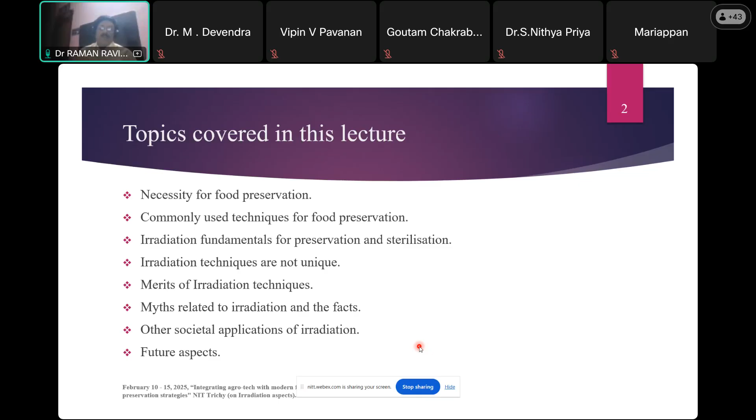So these few slides I will go a little faster. The necessity of food preservation is prevention of spoilage and decomposition, extension of shelf life. These have been very well dealt with by the earlier speakers in detail. Ensuring food value, health, prevention of wastage, and obviously economic benefits.

In this, prevention of spoilage is microbial growth because that rots and ferments, dormant enzymic activity that makes changes in color, texture, etc. Chemical reactions, oxidation, causing rancidity, browning, and all that.

Ensuring food value is important because everybody is now aware of food values and all that. Even the youngsters are aware. Enormous awareness has been created in the society also. So availability should be there.

Actually, this availability comes under food security, not safety. Then transportation over long distances without spoiling, because transportation is very essential. Even Swiggy, Zomato, and others, they are available over long distances also without spoilage, and accordingly the trade benefits.

Convenience, I think Professor Anand was telling about this convenience. Now husband and wife both are working, they cannot go for frequent shopping, they have to save time and other things. Prevention of food poisoning, so at the same time maintaining nutritional values.

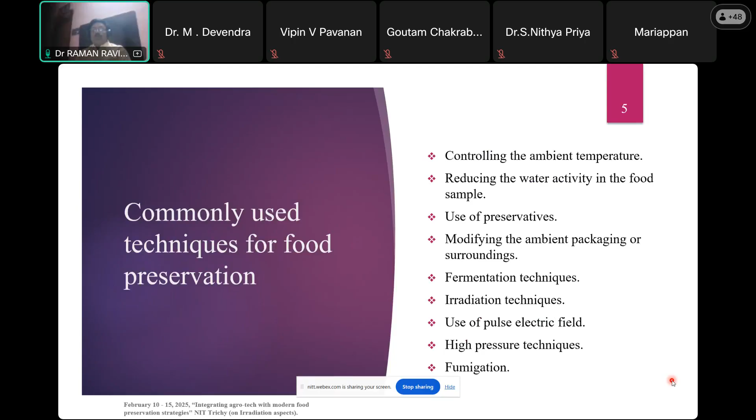Commonly used techniques, which you have seen also: controlling the ambient temperature, reducing the water activity in the food sample, use of preservatives, modifying the ambient packaging or surroundings, fermentation techniques, irradiation technique that we are going to deal with, use of pulse electric field, high pressure techniques, and fumigation. General techniques, temperature control, refrigeration, what we do in our homes.

This also dealt with, I will go fast. 0 to 8 degrees, freezing is below minus 18 degrees if you want to preserve for long term, and blanching before freezing if you do heat treatment—before freezing or before drying, that's called blanching, to inactivate the enzymes. Water reduction, humidity plays a very important role in spoiling.

So drying: sun drying, air drying, freeze drying, spray drying, drum drying, and all that inhibit spoiling. Salting and sugaring, yesterday the lecturer explained in detail, adding salt and adding sugar.

Since I am sharing my things, everything is there in simplified form, people can use it. Chemical preservatives: acids, lower pH, vinegar, citric acid, lactic acid, and others. Benzoates, sorbates, sulfites, nitrates, antioxidants, prevent oxidation.

As I already mentioned, oxidation gives rancidity and discoloration, so preserving means preventing oxidation. Then modified atmospheric packaging and other. Yesterday also the speaker nicely explained about this packaging with nitrogenous packing, CO2 packing, vacuum packing, and others.

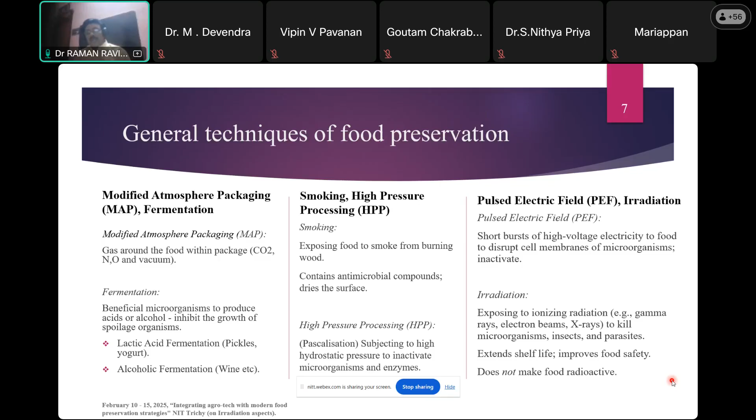Gamma rays, electron beams, X-rays are used for irradiating to kill microorganisms, insects, parasites, and it extends shelf life, improves food safety. The main thing is this—I will be repeating many times—this irradiation does not make food radioactive. Irradiation fundamentals.

Irradiation is a food preservation technique, similar to other techniques. It uses ionizing radiation to kill insects, molds, bacteria, and other microorganisms in food. It also inhibits sprouting and delays ripening. Similar to pasteurization of milk, it's called cold pasteurization, but used for a wider range of foods. Gamma rays, electron beams, and X-rays are used.

The process and mechanism will just see in brief, then we'll go detail. Actually, I told you 3 methods: gamma ray irradiation, electron beam irradiation, and X-ray radiation. X-rays and gamma rays belong to electromagnetic radiation. Electron beams are particle radiation, meaning particles. Gamma rays are from standard sources, very active high sources, kilocuries and megacuries.

This is basically an irradiator facility. The source is housed in a shielded container, with a shield opening and all that.

Basically, 2 types of sources are used according to the need: cobalt-60 or cesium-137. If somebody wants higher energy, then cobalt-60. Or lower energy but longer half-life, meaning you have to anyhow change it after 2 or 3 years, because the source activity gets decayed. Because all these radioactive sources have a half-life. They are getting decayed, disintegrated. Cobalt-60 is for high energy applications, and cesium for low energy, but if they want a longer duration of operation.

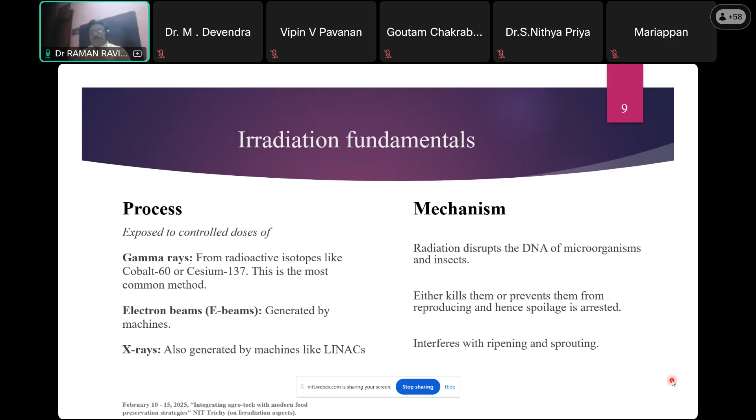The purpose of irradiation: disinfestation, shelf-life extension, stops germination, stops sprouting, improves technical properties like flavor and texture, delays ripening, and decontamination, especially for cereals and pulses, where you remove unwanted microorganisms, insects, and flies.

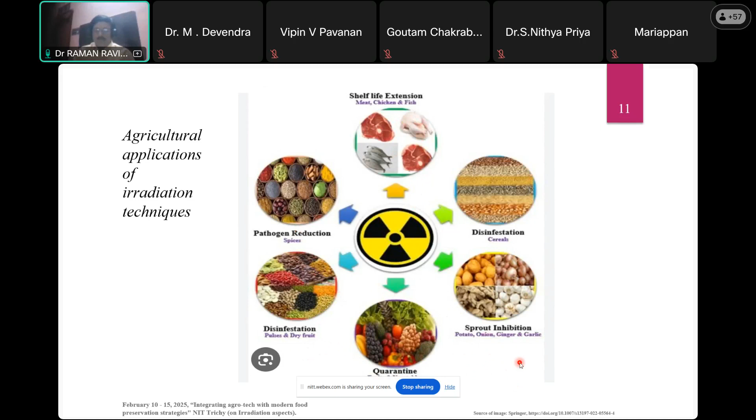Now we'll go to the food irradiation history. It's a long history, starting from the discovery of X-rays in 1895. The first patent for ionizing radiation for preserving food was in 1933, the first commercial application for food irradiation was in 1953, and FDA approval for using irradiation to sterilize food products was in 1958.

FDA approval for irradiation to control insects in wheat and wheat flour was in 1963, and product standardization, that is UN standard guidelines, was done in 1980. FDA approval for control of microorganisms in pork products was in 1986. European Union approved all these things in 1990, irradiation approved for pathogen control in meat and poultry, and in 2000 also approved for shell eggs.

And 2003, the great thing happened: WHO and IAEA endorsed the safety and efficacy of food irradiation. Our Atomic Energy Regulatory Board and FSSAI and others have also consequently approved it.

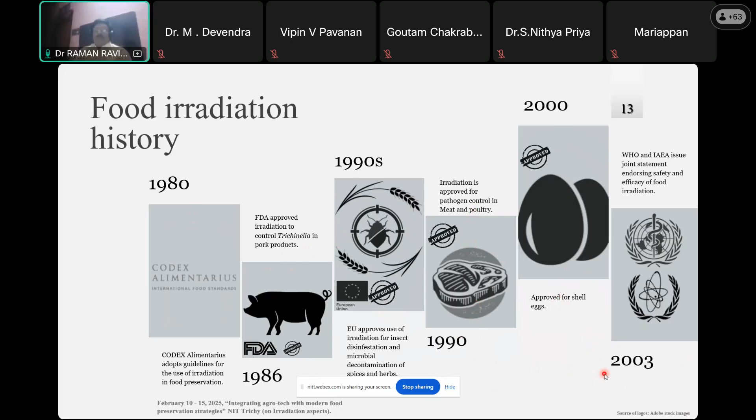Irradiation techniques are not unique, meaning they are multiple. Again we have seen the same thing: gamma radiation, electron beam radiation, and X-ray radiation. We'll see these in detail.

Gamma radiation, as I told you, uses two sources: cobalt-60 and cesium. Somewhere, very rarely, iridium-192 is also used, but generally cobalt-60. They have a wider beam - you get a wider beam in cobalt-60 as well as cesium-137. Cobalt-60 is a gamma emitter; first it's a beta emitter, and it emits two gammas.

The energies are expressed in million electron volts, which I will explain later. Just remember, MeV is the energy unit for these gamma rays and other subatomic particles. Cobalt-60 emits two energies: one is 1.17 MeV and 1.33 MeV, in addition to a beta. In fact, two betas are possible, either one can happen.

The other source is cesium-137. Cobalt-60 has a half-life of 5.3 years, and cesium-137 has a lower energy, 662 keV, but a half-life of 30.5 years. But 662 keV is also a powerful gamma ray, nevertheless.

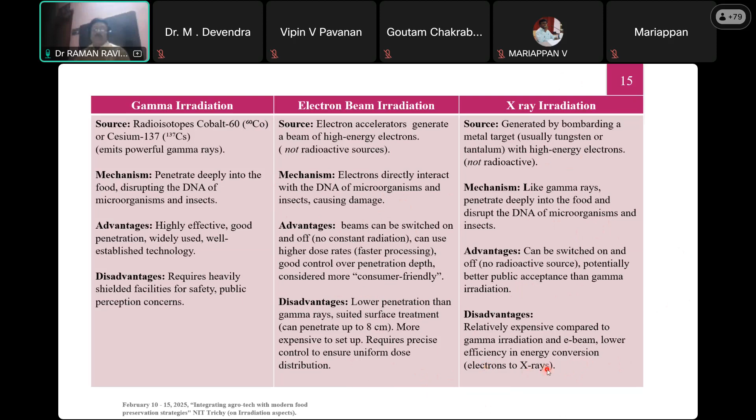Disadvantages: relatively expensive compared to gamma irradiation and E-beam. Lower efficiency, this is another problem with X-ray radiation. It means you need cooling, you need higher power, so you need higher electricity, and the energy conversion, what you call energy economics, is not that better than gamma irradiation.

Now, factors affecting food irradiation treatment. For all types of food, the same types of things are there. Depending on the type of food you are using, you have to give a different type of irradiation. Radiation dose: based on the type of food, you have to choose the radiation dose. Those data I'll give you. Then the treatment plan as well as treatment plant design, that means the facility design.

So design is based on regulatory compliance. Regulatory authorities have enough safety guides. The Atomic Energy Regulatory Board is the regulatory board for India. In fact, for one of the guides I was a co-author; I was in the editorial board.

And the exposure time and temperature, because with this radiation, say for example a gamma irradiator, gamma rays come from disintegration, like cesium-137. Cesium-137 decays into barium-137. During the decay, beta rays and gamma rays are emitted. During the decay process, an enormous amount of heat is also produced, and that needs to be cooled also.

And exposure time, because the overall radiation dose absorbed depends on the exposure time also. Some products require lesser exposure time, some more. Some will have a higher exposure rate but lower exposure time. This is because of the texture of the food sample getting irradiated.

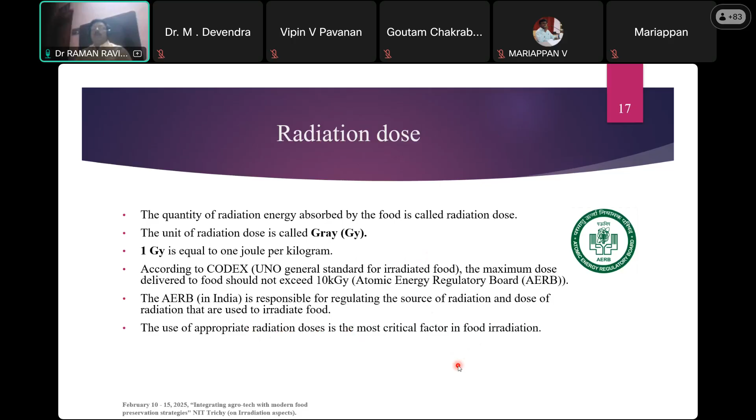According to Codex, the UN general standard, the maximum dose delivered to food should not exceed 10 kilogray. This is the AERB standard also. The AERB, Atomic Energy Regulatory Board, is responsible for regulating the source of radiation and dose of radiation used for irradiating food. The use of appropriate radiation doses is the most critical factor, because basically the dose is what kills the microorganisms.

I'll go faster. You may know about ionizing radiation and non-ionizing radiation. See, the microwaves in your mobile, infrared rays, radio waves used in cell phones, and microwave ovens are non-ionizing radiation. They don't ionize. What do you mean by ionization?

Hello? Hello? Am I audible? Oh, yes, sir, you are audible, sir. Okay, sorry, some disturbance was there. Actually, I do not know. Okay. Sir, sir, just mute.

Okay. I'll continue. So these microwaves are radio waves, these micro radio waves in between cell phones and then your radio broadcasting, TV broadcasting, what you are using, even for heating purpose, you are using infrared rays for pain killing and all that, ultraviolet rays for skin and all that. These are all non-ionizing radiation. They are also radiation. What is the difference?

An ionizing radiation, actually, when they interact with the atom, if they knock out the electrons, then it is called ionizing radiation. If electrons are not knocked out, the electrons are only shifted from one shell to another shell, then it's non-ionizing. That is not really that harmful. They are also harmful in that sense. These non-ionizing radiations produce enormous heat. See, you take a microwave oven. Microwave oven produces enormous heat.

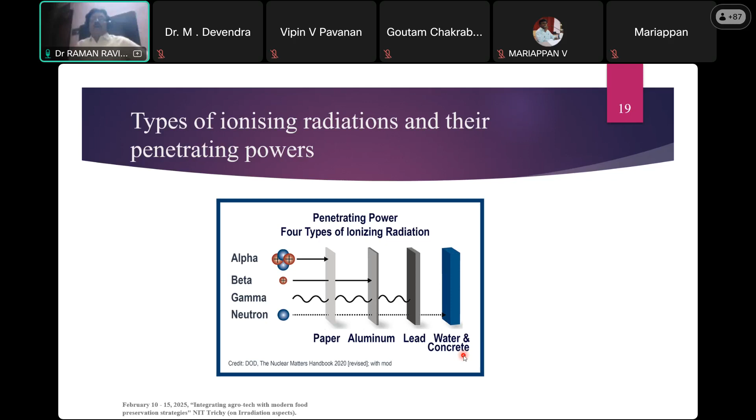They stop neutrons, because at very high energy, like particle accelerator facilities, neutrons are also produced. In high energy Linacs also neutrons are produced. These neutrons have to be stopped. So you need concrete, which is used for structural and mechanical strength as well as for stopping these radiations. They are reinforced concrete. They have iron inside the concrete that stops gamma also.

Wherever these figures are there which I have taken, I have given the reference. Okay. Then see, I was telling you repeatedly: by irradiating, you are not making them radioactive. That concept you have to take. Especially the range we are using for food irradiation never makes the sample radioactive.

For that you have to understand this one. Exposure, how this happens. If the source is outside, a person is standing, the radioactive source is intact. The beta particles cannot travel this much distance. Alpha particles' range in the air is also very small. So mostly gamma rays and X-rays, X-rays from X-ray generators, gamma rays from the source. And they will deposit only energy. They don't deposit any radioactive material in the body. So once you have moved out of the site, I'll tell you time, distance, shielding and other, then you are completely safe.

But if somehow the radioactive source has gone inside, how can it go inside? Just assume you are in the middle of a radioactive cloud or an airborne contamination area filled with radioactive vapors and all that.

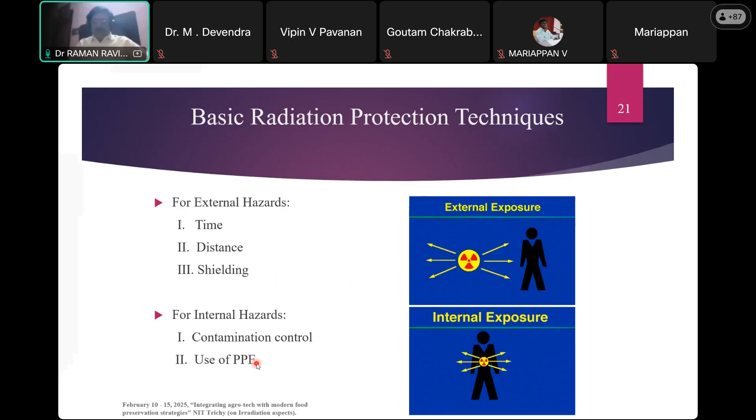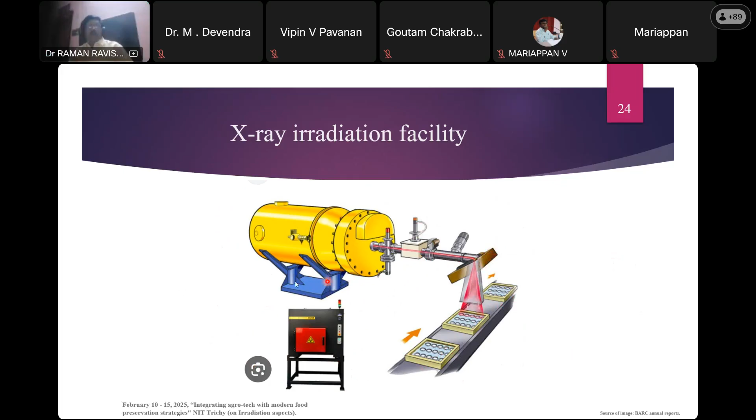Now I'll come to food irradiation. Two different types of irradiation: direct as well as indirect. I'll go to the next slide; I'll come back again to it. See, in the direct, it directly breaks the DNA of the sample or the cell of the sample, which leads to cell death. And indirect, it actually interacts with the moisture or water. See, most organic things have moisture. In fact, if you take our human body, it is 70% water.

So radiolysis, I will show you the reactions. And it produces free radicals. These free radicals you might have heard of: antioxidants, cancer prevention, and all that. With age, actually, free radical production in our body is also very high. That's why old people like me are more susceptible to cancer and other carcinogenic effects.

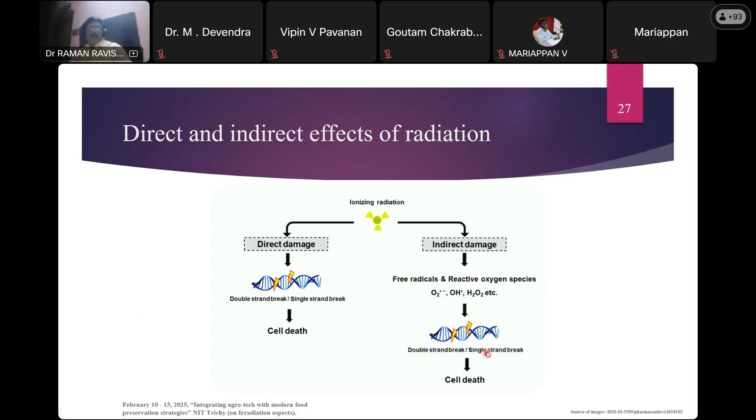So these free radicals are produced, and they form very active components like hydrogen peroxide and others, which chemically break the DNA, which causes cell death. I'll go to the previous. Direct effect: electromagnetic radiation, X-ray, or particle beams like electrons directly strike a molecular complex, a biological material, for instance microbials, altering and destroying its biological function. This can lead to chromosomal disorder or mutations, and in some cases cell death. However, the direct effect is considered less important compared to the indirect effect.

In high moisture foods, radiation produces free radicals through radiolysis of water. Highly reactive hydrogen and hydroxyl radicals are produced, H and OH radicals. They combine to form hydroperoxyl radicals, that means H2O2, hydrogen peroxide. They play a major role in microbial inhibition through oxidative effect. They interfere with biological reactions, alter molecular structure, break the DNA molecules and all that. So this is the reaction.

H2O with the energy of the radiation forms H2O+ and e-, and this H2O+ and e- form H+, OH and e- aqueous. This OH is an OH radical, and the other H2O with the electron forms H and OH. This H is a free radical. This H+ from here and this H along with a free electron form H2, and OH forms H2O2.

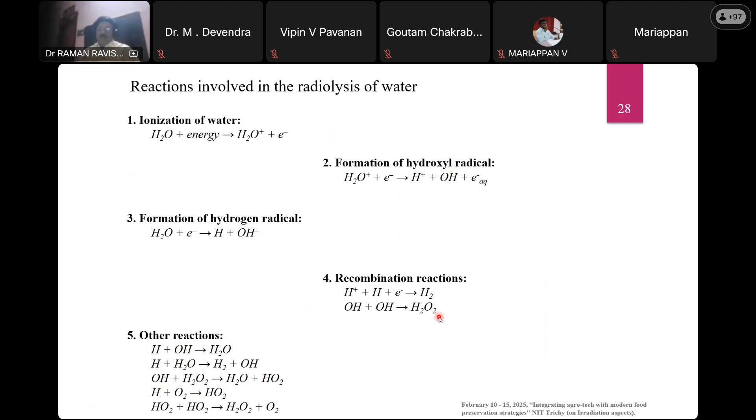So I can give you one small thing. Hopefully I have time. I used to tell my students, and I used to take training classes also sometimes, other than my research as well as emergency coordination and other things, as safety head.

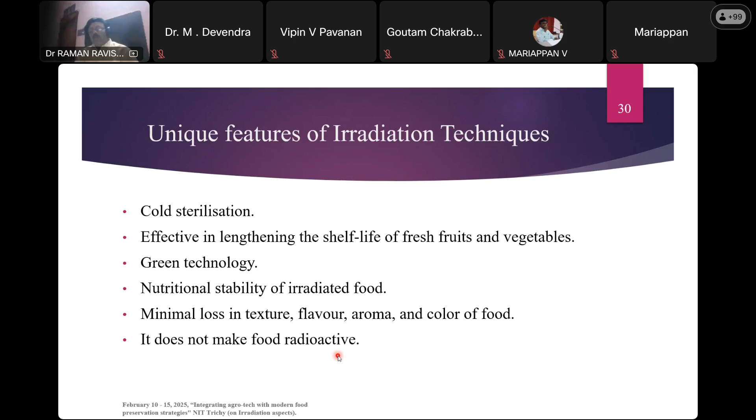So irradiation techniques, as I told you, are cold sterilization, effective in lengthening the shelf life of fresh fruits and vegetables, green technology, with nutritional stability of irradiated food. I will also tell you what small disadvantages there are: minimal loss in texture, flavor, aroma, color of the food. Again, it does not make the food radioactive. It's very, very safe. That's why in 2003 the UN accepted it and everybody is following it throughout the world.

Okay. In sterilization, many people have said sterilization is much more than pasteurization. Some of your students have said 120, 121 degrees centigrade is required. Cold sterilization can be done with irradiation. You can sterilize medical equipment like gloves, knives, surgical equipment, bandages, etc. One great advantage of medical sterilization with irradiation is that with most sterilization methods you finally have to pack it, and during packing there is a possibility of contaminants entering.

Here, hygienic handling has to be done also, but afterwards it is packed, and after packing it is sterilized with irradiation, because it is vacuum packed or sealed. With the packing, you can sterilize with irradiation. Then there is no further contamination or risk of contamination during packing.

See, there are three modes. Basically, irradiate and prolong the shelf life, irradiate and kill, and irradiate and can food. The first is radurization. This applies to low radiation, prolonging the shelf life during storage, inhibiting germination, pest control, slowing germination. Radicidation is killing. Killing means higher doses, up to 10 kGy are required, to selectively kill microorganisms like salmonella.

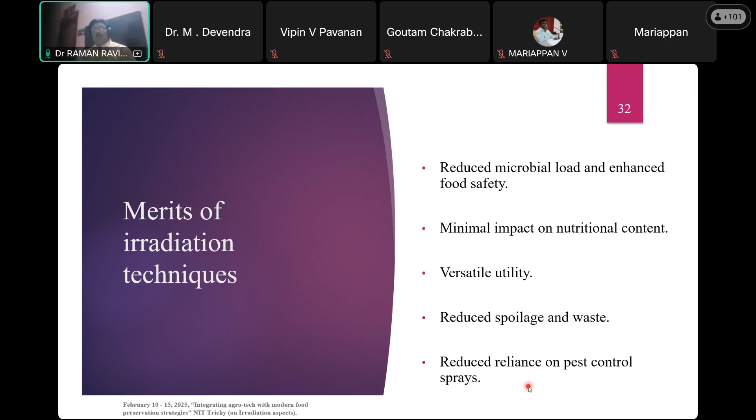Especially for fruits and vegetables, irradiation delays the ripening of green bananas, inhibits sprouting of potatoes, prevents greening of potatoes, softens legumes and shortens their cooking time, increases yield of juices and grapes, and increases the drying rate of plums. These are the benefits especially for fruits and vegetables.

Now I come to the important and interesting part of it: myths. There are many myths. I have quoted some 8 important myths or misconceptions about this irradiation technique. I won't read them all here because I'm going to handle each separately. There are 8 of them.

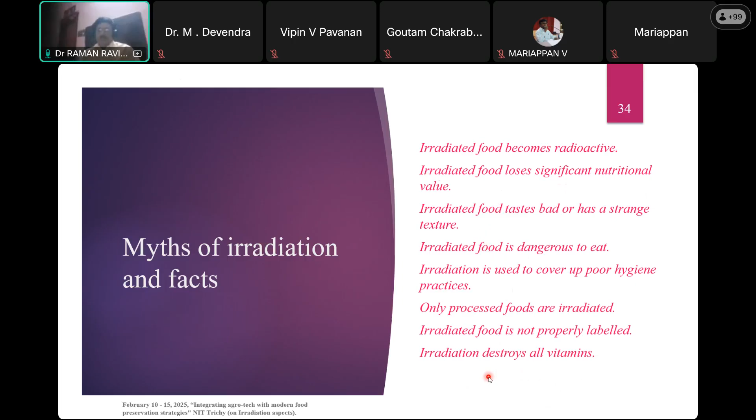The first myth or misconception is that irradiated food becomes radioactive. I already told you this. Irradiation does not make food radioactive because the energy levels used in food irradiation are restricted. Why do I say energy levels? Because with very high energies, there is a possibility of making the sample also radioactive. Here the energy is much lower, so there is zero possibility of making irradiated food radioactive. The energy levels are restricted so it does not induce radioactivity in food. The process is similar to shining a light on an object. The object does not become a light source, it is simply exposed to the light. You are shining the light and the object is exposed to it. It does not gain energy unless it's for a very long duration or very high intensity. It's simply like shining a light, that's all.

Another myth: irradiated food loses significant nutritional value. Minor nutrition losses can occur during irradiation, but they are comparable to or even less than losses during cooking, canning, or freezing. Nutrition loss depends on the type of food, the dose of irradiation, and storage conditions. Irradiation actually preserves nutrients by preventing spoilage, so if spoilage is less, nutrients are also maintained.

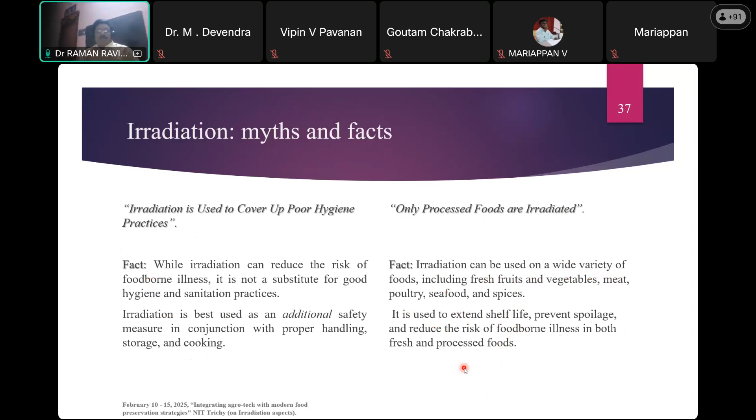Irradiated food is not properly labeled - earlier this might have happened, but now there are strict regulatory compliances. Nobody can avoid it; they have to put the Radura symbol, an internationally recognized symbol, and a statement indicating 'treated with radiation' or 'irradiated.' This allows consumers to make their own choices.

Irradiation destroys all vitamins - this is another myth, though small studies show a small reduction, mainly of thiamine. Comparing boiled rice and raw rice, people eating raw rice actually are deficient in thiamine because thiamine is present in the husk. During boiling or parboiling, the thiamine diffuses into the rice, which is why parboiled rice is more nutritious than raw rice. In many cases, the benefits of irradiation, such as preventing spoilage and reducing foodborne illness, outweigh the minimal vitamin losses that may occur, and these losses are actually very small. So the claim that it destroys all vitamins is not true.

There are many societal applications of irradiation. As Joel mentioned, there are broader applications too. Since I got the opportunity, I'll give some broader applications very quickly: diagnosis, radiation diagnosis, radiation therapy - I will show you some slides. Therapy means radiation treatment, sterilization, palliative care. Palliative care means for terminally ill cancer patients who need pain reduction, radiation is used for that. Then there are a lot of industrial applications, agricultural applications - I'll discuss each one - research applications, security applications, and so on.

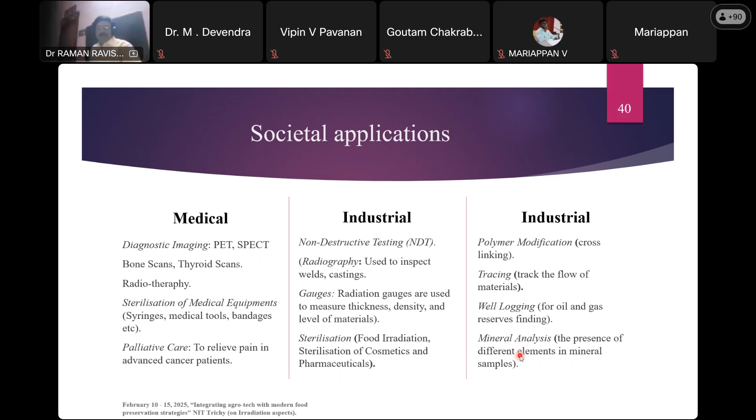In agriculture, we have seen food irradiation. Insect control uses sterile insect technique (SIT), which uses radiation to sterilize male insects. There's also plant breeding for mutation in plants.

Soil moisture content is measured using neutrons. I have done work on moisture content in soils and moisture content in concrete, both experimental and theoretical, and I have some publications on soil moisture content using radiation.

Tracer studies are also used for plant fertilization uptake throughout the entire plant branches, using radio tracers. For research, since I worked in a particle accelerator facility with high energy particle accelerators, radiation is used for basic fundamental nuclear physics research, material science research, and radioisotope production for medical and other industrial purposes.

Material science involves material damage studies - in reactors, materials undergo a lot of stress and strain with changing mechanical properties, which can be tested in a small-scale manner using particle accelerators and radiation.

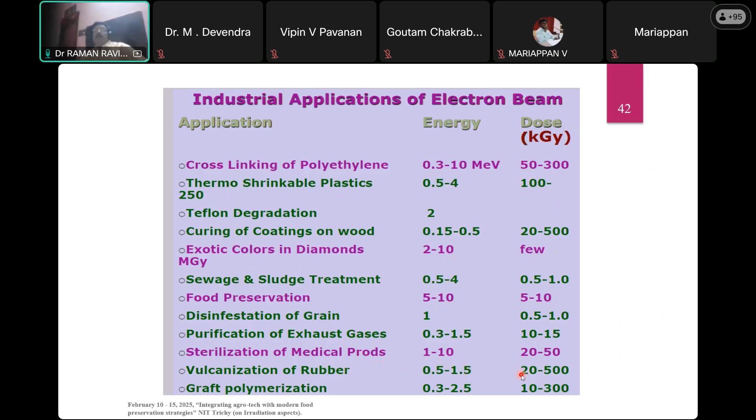With few megagrays only, food preservation we have already discussed. Sterilization of medical equipment requires up to 10 MeV only, but you require 20 to 50 kilogray.

The half-lives are very small. This fluorine-18 is only 110 minutes. In 24 hours, it becomes zero almost.

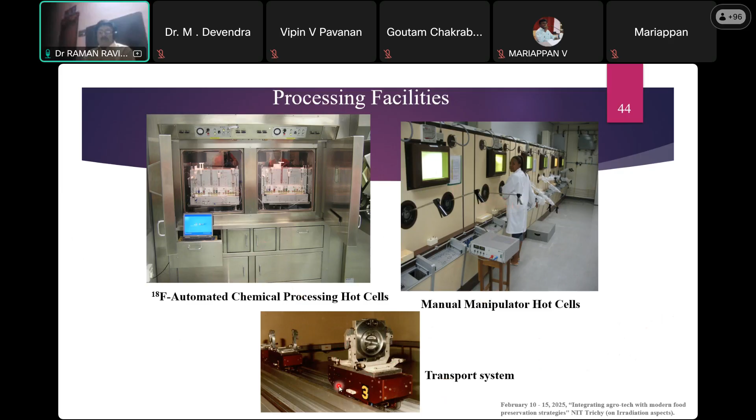This F18 is processed in hot cells, done through remote handling, either manually or automatically. Transport systems are there, within very enclosed shielding systems. After production, it is transported and taken to the dispensing room, which is kept in a clean room.

Many people may be knowing about the clean room concept. The number of particles are restricted. Class 3 or class 4 type clean rooms allow not more than 1,000 or 10,000 particles per cubic meter. This is an automatic dispensing unit, and quality control facilities are also there.

These are some of the isotopes I'm showing you. In a cyclotron, energetic charged particles are required to bring about nuclear reactions. Basically you require a proton beam or a deuteron beam, generally used, or an alpha beam is used. Target preparation, target cooling, selection of energy, all these things are important when compared to reactor.

Reactor also means nuclear reactor, where these isotopes are produced too. Why am I telling these things? We told gamma sources and where these things are produced - they are produced either in a cyclotron. Cyclotron means it is a cyclic particle accelerator.

Like copper-65 with an alpha particle - A stands for alpha, just take it, because that alpha symbol I could not use in the slide. It's an old slide of mine. So gallium-67 plus 2 neutrons. The energy of the alpha is about 32 MeV.

And tellurium, which gives iodine-123, the energy of the proton requirement is 14.5 MeV.

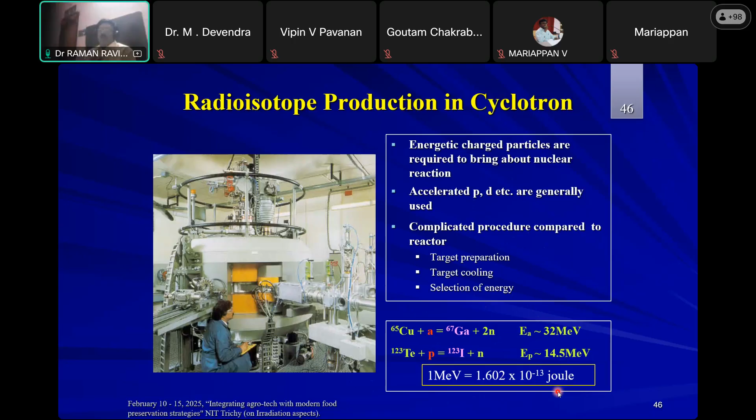In a reactor, these radioisotopes are also produced, through different modes - N gamma, meaning neutron irradiation emitting gamma, neutron irradiation emitting fission particles, N proton. In the N gamma reaction, molybdenum is produced, and with the neutron it becomes radioactive - molybdenum-98 to molybdenum-99, this is stable, this is radioactive.

Uranium-235 is a fissile material, with a neutron it gives fission along with this, molybdenum-99. They are chemically separated, through various methods like precipitation, chromatography, solvent extraction, distillation and all.

So there is a need for automation and remote handling in a shielded box. This is the Dhruva reactor in Bhabha Atomic Research Centre, BARC, Bombay, Trombay, and this is producing isotopes for all these radioactive sources.

Nuclear medicine is the branch of medical science which uses unsealed sources, radioisotopes in suitable formulation. You have a pharmaceutical group, radiopharmaceuticals, for management of various diseases. Of radiopharmaceutical uses, 90% are diagnostic applications; therapeutic applications are only 10%. So the branch of medicine which uses these radiopharmaceuticals is called nuclear medicine.

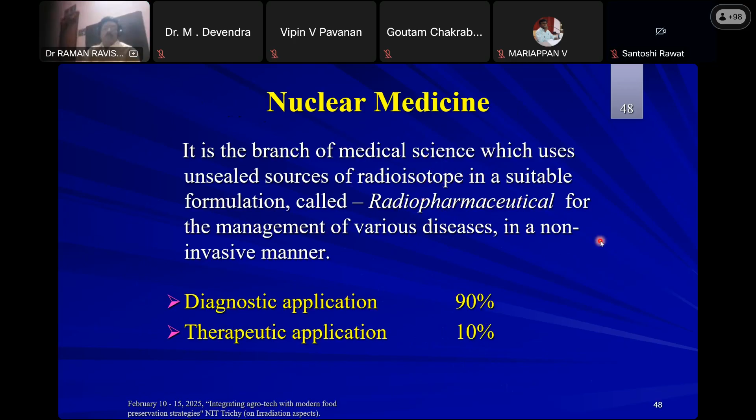So this I will go a little faster, of course we have not many slides, I have another 10,

12 slides only. Highly pure, non-toxic radiochemical formulation suitable for administration to humans orally or intravenously. In the case of iodine, iodine uptake is given orally. In the case of other isotopes, for example FDG, it is given intravenously. For organ investigations, in vivo or by studying localization, uptake, excretion, and distribution. In certain cases they bring about a therapeutic effect, determined based on localization, uptake, excretion, and all that.

Commonly used are iodine-131, technetium-99m, fluorine-18, and technetium-99 in different forms. Actually, you cannot just directly use the radioisotopes. You have to use iodine in the form of sodium iodide, technetium in the form of sulfur colloid, fluorine in the form of a glucose called FDG, fluorodeoxyglucose. Similarly technetium also.

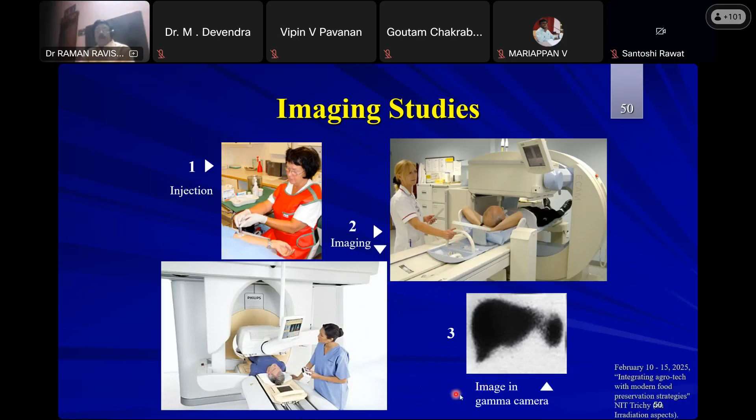In PET, the radioisotope is injected, like FDG fluorine-18. Basically, it is a positron emitter, beta plus, as I told. Then annihilation radiation takes place. The positron annihilates with an electron, giving gamma with an energy of 511 keV, and you have full 360-degree detectors. So what happens if radiation is emitted?

It emits two photons, so you are getting 511 keV gamma photons in both directions. In the case of beta plus, the positron annihilates. In the case of FDG, it emits a positron, and the positron annihilates to two gamma rays at 180 degrees, and two detectors are sensing the gamma rays.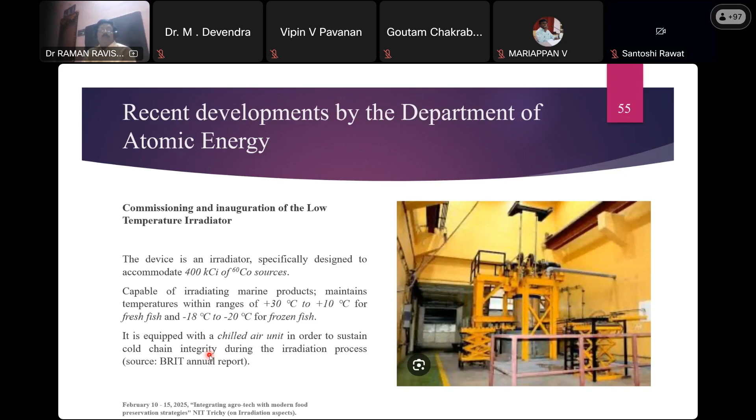So I will finish it. I have only 3 more slides.

Okay, and for the Himachal Pradesh flood and landslide affected people, our department, the Department of Atomic Energy, sent preserved irradiated food, which is called litti. Litti is made from besan, gram flour, kadala paruppu. It is a food North Indian people eat, and it can have a shelf life of 8 months if unopened. A litti consignment of 350 kg was sent.

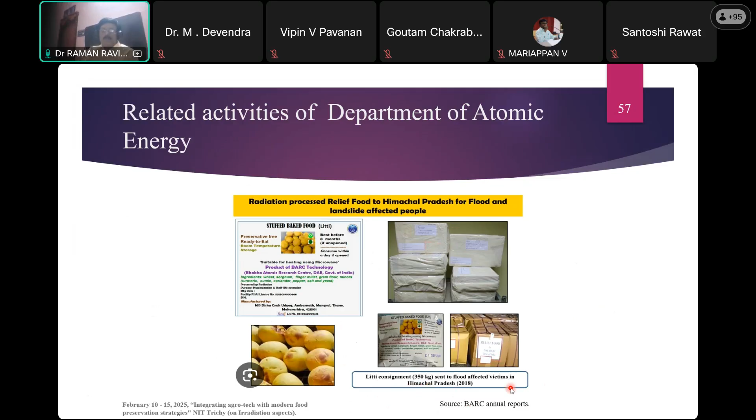And challenges: consumer perception is there, cost effectiveness. If you want a small project, it is not suitable. If it is a larger project, it is cost effective, because the initial cost is high but the running cost is not that much. Public opinion and advocacy groups are there, people who always oppose.

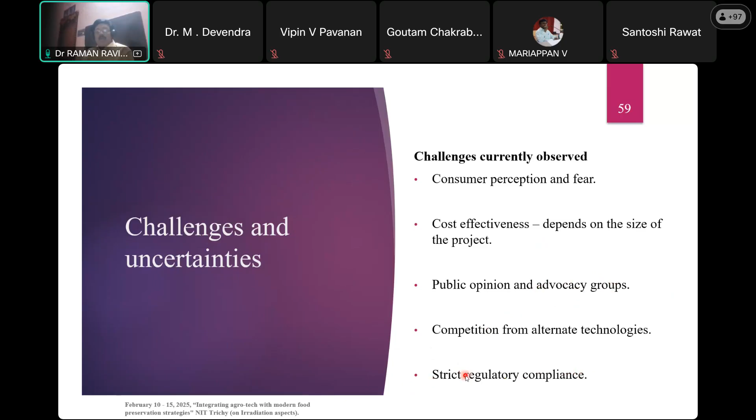Competition from alternate technologies is there, like Dr. Anand was telling about cold plasma. Cold plasma, I do not know whether it will be possible on large scales. Hopefully soon it will come. Strict regulatory compliance is there, but compliance is now taken care of and people are following it. High initial cost, public perception, small mild changes in sensory properties, regulatory issues.

Another is irradiation-resistant organisms, like Halobacterium, Deinococcus radiodurans; these types of bacteria are irradiation resistant. They produce toxins. Nevertheless, these bacteria are not very common. So these are some uncertainties.

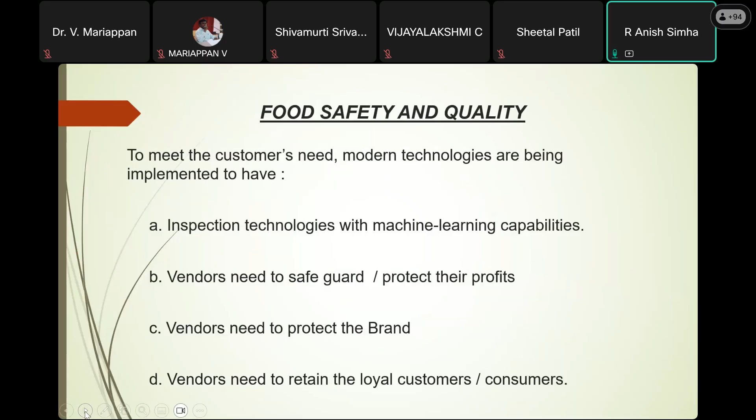So methods now being implemented are product inspectors to detect harmful foreign materials with X-rays and metal detectors, which are good at detecting metal or bones. But then it is difficult to detect low density or non-metallic foreign materials like plastic, rubber, wood, paper, and objects similar in color to the food product. These are the challenges which are currently being faced by the food industry.

Then there are solutions like using artificial intelligence driven vision inspection systems to enhance the detection capabilities and operational efficiencies to meet the challenges of the modern production environment. Artificial intelligence inspection technologies address the need with an objective inspection process, which otherwise will be difficult to be achieved by human beings.

So artificial intelligence vision inspection systems require human involvement in training and maintaining these systems. The systems are also created by human beings, but then we make these systems to work for us, but then manpower is required to maintain and monitor that the systems are working as per our requirement. So artificial intelligence can never completely replace the human factor in food production.

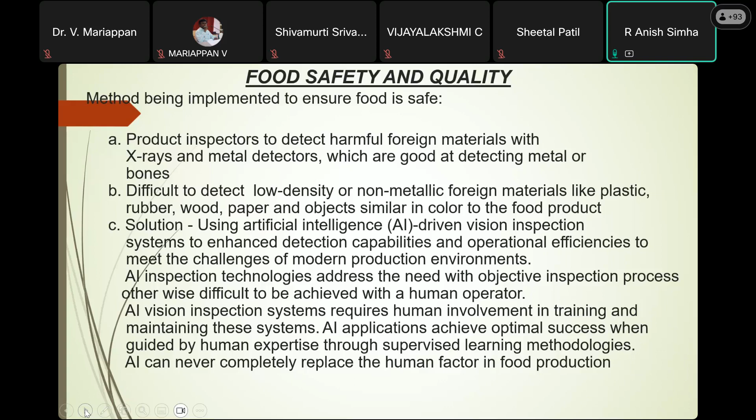So these are the few slides which I thought we will be sharing regarding food safety. Then there is this food processing 4.0. I'm sure most of you may be knowing, since we are not manufacturers of food, so this information is available to all. Food processing 4th industrial revolution, they call it, where technologies improve quality and safety of processed food products, reduce production costs and save time, save energy and resources, and diminish food loss and waste.

See here, we do contribute in all these aspects to reduce the production cost and time, then save energy and resources, to diminish food losses and waste. The demand for food will increase from the current rate what we have. It will be further increased by another 56%, and the data says that by 2050 the world will be about 9.7 billion in strength. So many people need to be fed.

The need will be food with enhanced nutrition value, consuming fewer resources, preserving biodiversity, and causing low environmental impact. So this is all required to prevent food insecurity and hunger. We need smarter food processing, innovative strategies, technologies, and machineries. High connectivity and automation assisted by computing power are the key elements that can revolutionize the food processing system.

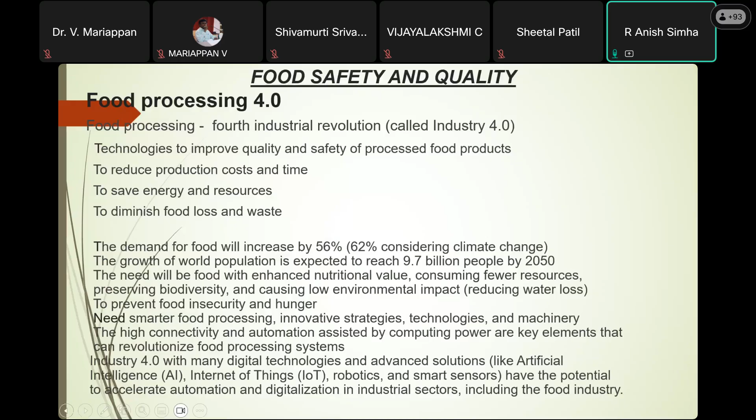But now what I see here with Industry 4.0 is that they have combined all the points, and they want all the players in the food industries to start utilizing these resources and ensure that we have minimum wastage. So this is the inference what we can get from the information available on the internet, etc. So now coming back to our topic of today.

So we have to protect the fruits, vegetables, then dairy products, ice cream or the frozen desserts, then dry fruits, seeds, spices, dal, marine products, poultry and meat, ready to eat or ready to cook, then medicines, of course, raw materials used for FRP and GRP products. So these are basically in the aircraft industry and automobile industry. Then the warehouses or the third party logistics.

All these products we require to store in the specific temperature and humidity, and the shelf lives are defined at the various temperatures. How long these products can be stored, it is defined, and we have the data, and accordingly we, as a cold storage turnkey solution provider, anybody in this industry like us, we are always striving our best to see that the losses in these products are reduced when they are being stored. So we need to maintain the specific conditions inside the room as required.

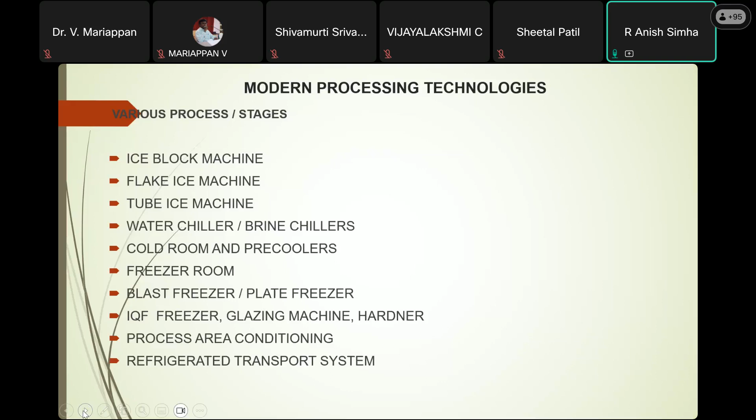Freezer rooms are for all the frozen products, and we freeze them through blast freezers or plate freezers, and depending upon the quantity of the product, an individual quick freezer can be used. And especially for shrimps, we use an individual quick freezer followed by the glazing machine and then the hardener. These are the processes which we'll come to know shortly. Then all these areas where these processes are taking place also have to be in a conditioned space. The air has to be clean, and we need to maintain the proper temperature inside the room. And we require the refrigerated transport system to transport these. Then handling, cleaning, grading, sorting, packaging, and testing.

So at every stage, the safety of the product is the prime concern, and we need to have the construction in such a way that dust is avoided; generation of dust and external dust we reduce to almost minimum. And then depending upon the product properties, we need to maintain the humidity. Like for fruits and vegetables, we maintain a very high humidity, but when it comes to seed storage, we will always maintain a lower humidity in those rooms.

So depending upon the product, the temperature and humidity will be controlled. Because when we go below 0 degrees centigrade, it is very difficult to control the humidity. So in commercial applications, below 0 degrees centigrade, humidity is not being talked of. That is in the commercial refrigeration industry. This is what is being done today.

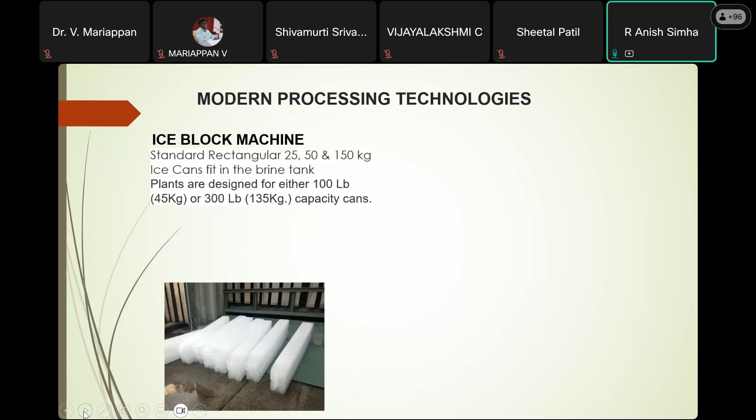So block ice machines, I'll just show you some pictures. This is how the ice blocks are. Some people use seawater if it is for the marine industry and to safeguard fish. And some people use it for different applications, maybe the water can be clean water, but almost all of them, either it is seawater or clean water, you get ice blocks.

So how they are produced, you can see there are these kind of cans. The cans will be dipped in these slots, and in this tank will be a brine solution, and then there is a refrigeration coil kept here in which the refrigerant is circulated. This refrigerant will chill the brine, and the brine in turn will freeze the water, and we get this ice. There are mechanisms where you can lift these cans, something like this, and then you get ice.

So this is one of the beginning stages where the refrigeration industry player will start their work for fisheries. They take these ice blocks and then they go for fishing. There are various quantities required, like 20 ton per day or 24 metric ton or 30 metric ton.

Depending upon the customer's requirement, there are so many models in the industry, and there can always be a non-standard design to the actual requirement of the customer. The basic principle is the same, it's only the sizing of the equipment that will vary.

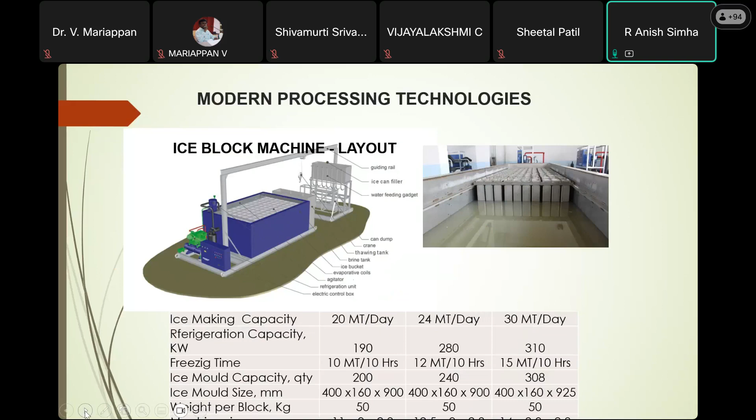So this is how the evaporator unit we showed there looks like. This may be during manufacturing, and this can be after completion of the work. In these evaporators, the refrigerant will always keep flowing around, and then it comes back from the unit. It's a closed loop cycle, so the refrigerant is always moving in a closed loop cycle.

These are the condensers where heat is rejected. I'm just showing you a few pictures. These are some shell and tube condensers, basically used in the marine industry. Some people use even seawater directly, and heat is added to the seawater, and then this seawater is let back into the sea.

Of course, the water is being collected at one source, and for the hot water which is going into the sea, there is a regulation which our customer, the end user, needs to follow based upon the local government. When hot water is being put into the sea, they have regulations, and accordingly they take care.

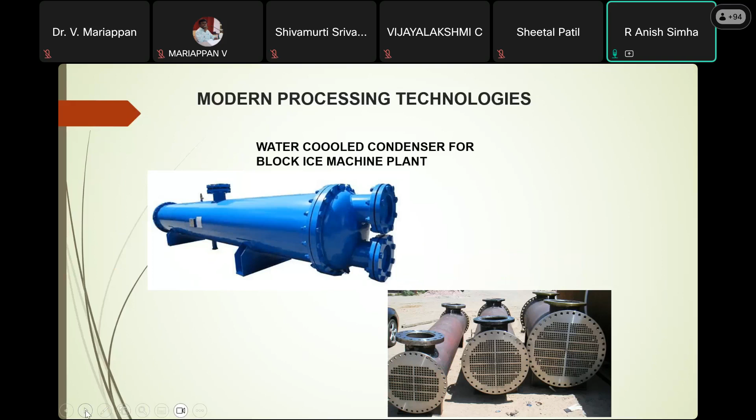It can be used in many industries. If the water is food grade, then the equipment also will be food grade. Then the ice can be used for consumption, or for packaging. So there are many applications for these.

And then these are called tube ice. Flake ice was like gratings; tube ice will be in tubular form. Similarly, water is made to flow down here, but here it's not on the surface; there are tubes fixed to the tube sheet on the top, and water trickles down. By the time it reaches somewhere here, it becomes ice.

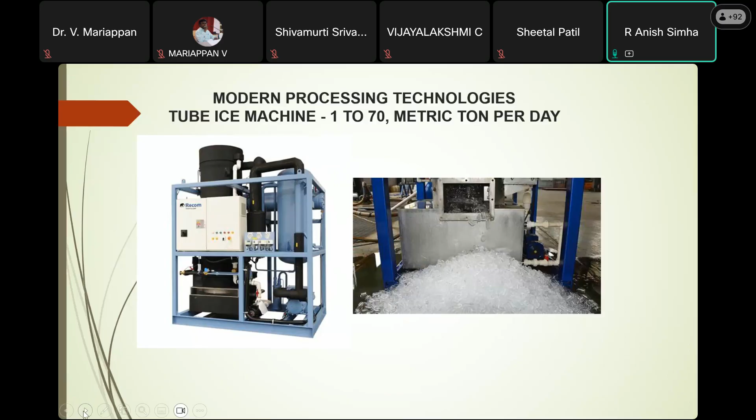So everywhere we ensure that safety-wise, the material of construction is defined well, so that the food which goes into the human being, if it's going directly, then this will be with stainless steel. Or if it is going to be cooked, then since it is going to be cooked, the water will be of food grade. So there are various precautions that are being taken care of.

And this is a summary for the marine industry. Similarly, I have just presented you some slides from the marine industry currently, but this is applicable for other industries also. It will be almost similar.

So when we have to make block ice, my refrigerant temperature will be minus 18. So ice temperature will be in the range of minus 4 to minus 5 degree centigrade, or minus 7 degree centigrade. So then why is there a huge difference? Because this refrigerant is not directly making ice. There is a brine, or water with salt, whose freezing point is lower than water, and that brine temperature can be about minus 10 or minus 12 degrees centigrade. And then with that minus 10 to 12 degrees centigrade, we freeze water to ice, which is at around minus 5 degrees centigrade.

Similarly, for tube ice machines, there is no indirect cooling. There is direct cooling in tube ice machines where the temperature will be about minus 15 degree centigrade, and that is the temperature of the refrigerant.

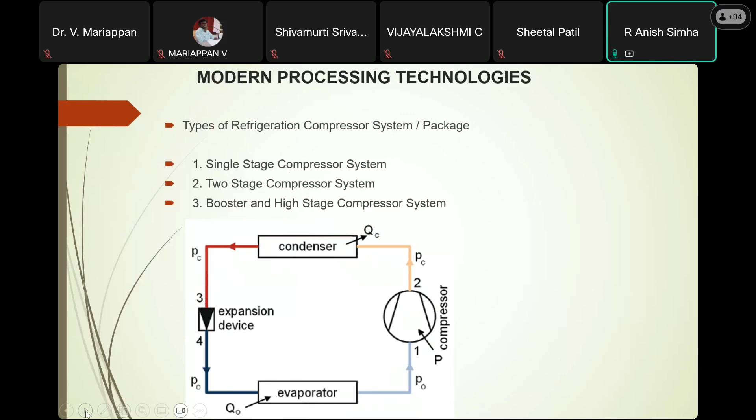So there are many manufacturers, and we have data to select them. That is how the single stage or two-stage refrigeration system works, and how internally the refrigerant goes into the system. We have a direct expansion, which we've seen with the thermostatic expansion valve, and there's another system called a flooded system. All these we are discussing today because they are required to save power and the environment.

When we use a flooded system or a pump system, the refrigeration capacities required will be higher, and we use a natural refrigerant when we go in for a flooded system or pump system. So first we have seen direct expansion.

Now we'll see what a flooded system is. From the condenser, we have liquid refrigerant coming out, which is stored in the receiver. From the receiver, this goes into the evaporator through a vessel called an accumulator. The expanded liquid gets filled into this vessel and ensures the coil is always flooded with liquid. This happens through gravity, with no external force other than the pressure created by the compressor.

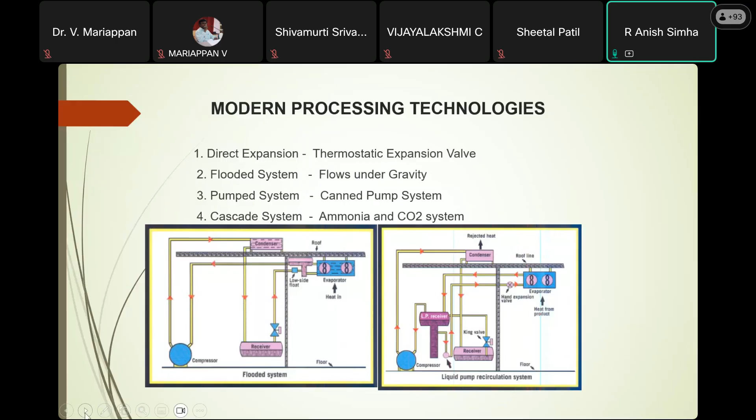There is some hesitation in the market at the moment to go in for a CO2 system, which we will overcome. There are also technical issues that need to be resolved when using carbon dioxide systems because of the pressures - in tropical conditions, the condensing carbon dioxide will reach a critical pressure. We want to avoid operating carbon dioxide into the critical pressure region, so that's why we try to use cascade systems. This is being implemented, and once the quantities of these kinds of systems increase, we'll be in much safer conditions with reference to the operation and usage of the refrigerant.

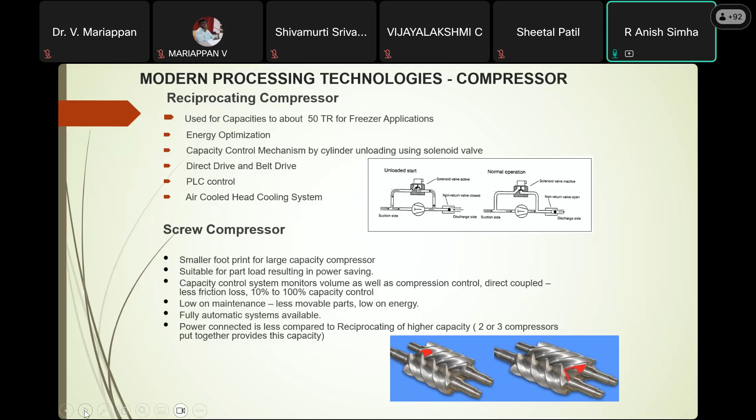So there are advantages for screw and reciprocating compressors. If the system's capacity is smaller, where the plant size is smaller and the refrigeration load is smaller, reciprocating compressors are preferred. For larger capacities, screw compressors are preferred, and they're also available in the market. This gives a larger capacity and occupies less space. Reciprocating compressors do have limitations with reference to the refrigeration capacity of a single compressor.

When we talked about refrigerants being safe for the environment, we have natural and synthetic or man-made ones. Ammonia, carbon dioxide, and hydrocarbons are basically the natural refrigerants currently being used. Then we have the synthetic refrigerants: CFC, HCFC, HFCs, and HFOs.

The most important thing today is that almost all refrigerants have zero ozone depletion potential. The point of concern to us is the global warming potential. Currently, wherever possible, and depending upon the refrigeration system capacity, we go in for either an ammonia system, or ammonia and CO2 for large food industries, because there the refrigeration capacity required will be on a larger scale. In smaller systems, still in our country, we are using 404A, which actually has a very high global warming potential compared to other similar refrigerants.

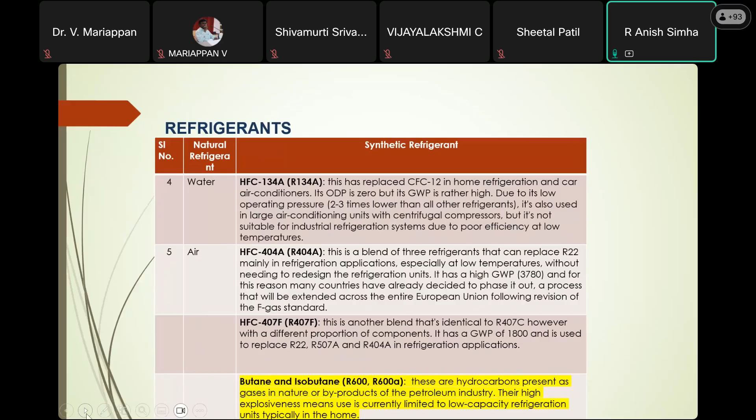We have petroleum-based refrigerants, but we need to limit the quantities of refrigerant per system. For smaller systems like refrigerators, small ACs, and small refrigeration units where capacities are within 1 TR, petroleum-based refrigeration systems are also being used if they are suitable within that particular operating condition. So this is what I wanted to share regarding the refrigerant.

It is also manufactured with green refrigerants, and wherever energy can be conserved, these are used, and there are ratings provided for manufacturing of such systems. Basically now most industries are going in for green-based refrigeration panel manufacturing.

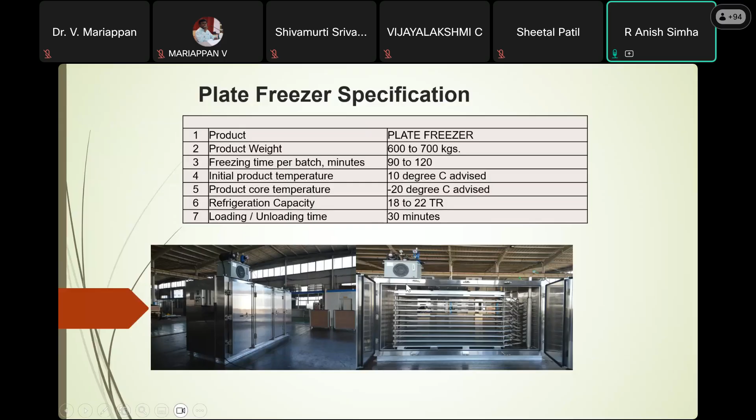Similarly, if these plates are vertical, we call it a vertical plate freezer. Here again, for food safety, the material of construction will be stainless steel, and there will be no rust allowed on any of these materials. You can see this entire thing is of stainless steel construction.

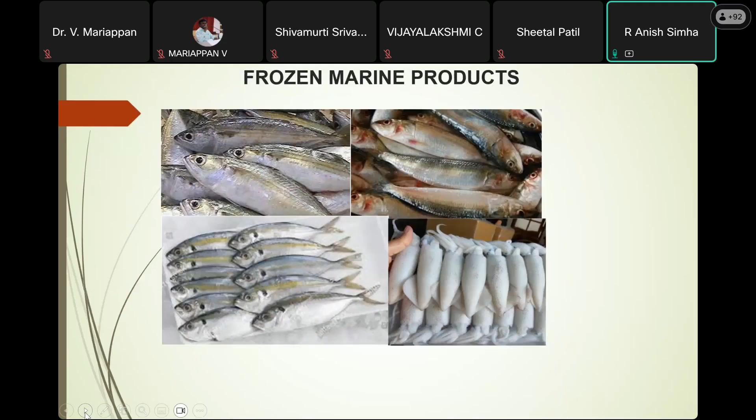So at the inlet of the individual quick freezer, it will be fresh fish from the sea or from water. After fishing, the fish moves in trawlers which have ice water, and then after they are cleaned and inspected, they are fed into the conveyor. So this is the outlet of the conveyor of an IQF. At the inlet, the fish will come through a conveyor, and there are people on both sides of the conveyor working to identify any fish which is not good, so they sort it off. So that is how the safety precautions are being taken.

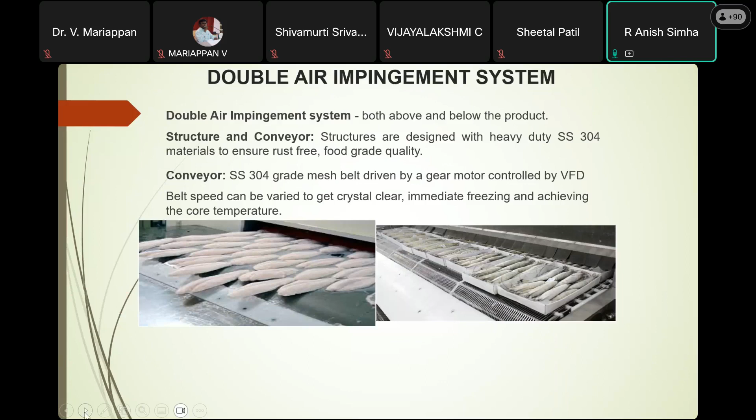And then in case of fish, first we freeze the fish, and then especially for shrimps, we do the glazing. The glazing is nothing but the frozen fish, when it is moving through the conveyor, will again be dipped in water, but it will not stay in water. It just moves through and comes out, so that the product body will be wet with water. Then again it's hardened. So the basic idea is to protect the shrimp from any damages by building a thin layer of ice around the body. So that is how it's called an IQF, where we freeze, then the glazing machine, and then the hardening machine.

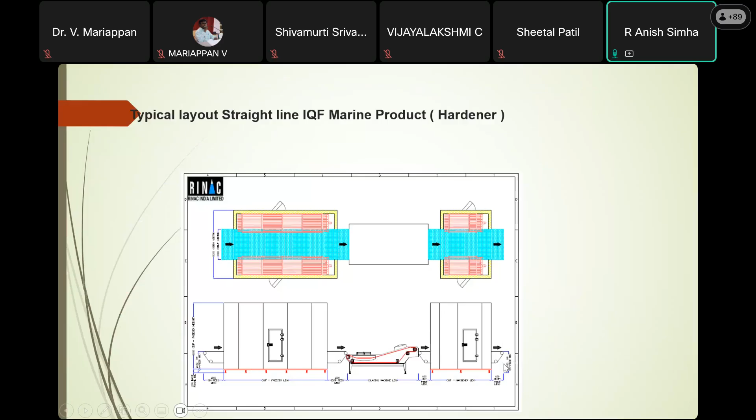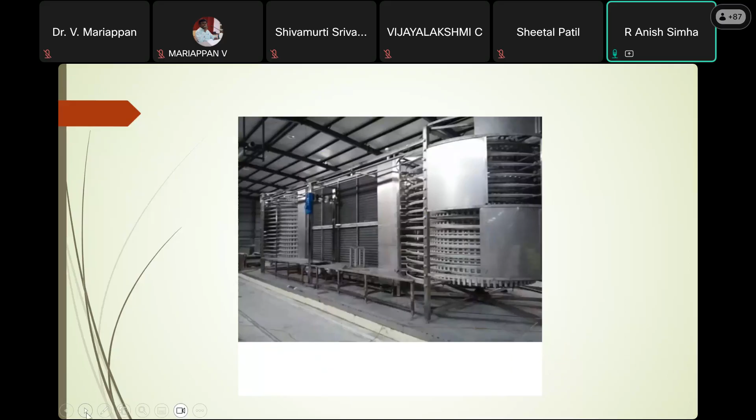And by the time it comes out frozen, it is dipped in water and then put into another similar freezer, where the water on the surface of the frozen fish also becomes ice, and then it is packed and dispatched. So that is the straight line, and then of course we have the spiral, as the name itself indicates. Product enters through the conveyor, moves around this way to the top, gets frozen, and then comes out. So application-wise, for different types of products we use either the straight line or the spiral, and in fish, the double impingement is also used.

So once the product is frozen, the challenge is storing. How to store? We can construct rooms of various sizes, and there are provisions where you can expand the room size. But with the current land prices, every square meter is very costly. So we have to work out the best option of storing the products without them getting spoiled or damaged, and we should be able to quickly retrieve the product. These are the challenges the industry faces currently, and there are solutions for that.

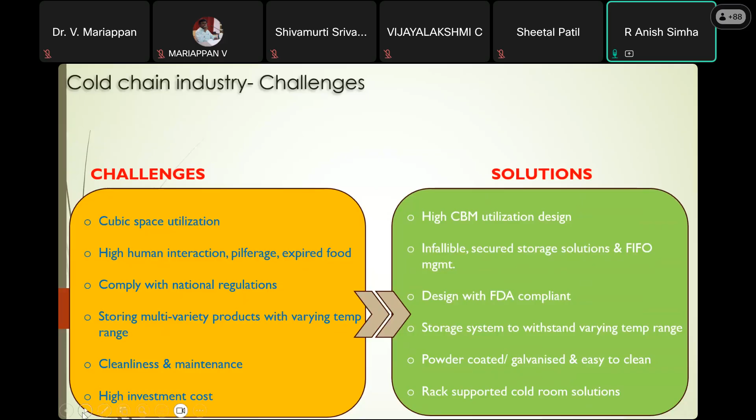So for the dairy, we have to store ice cream, we have to store milk products, that is processed ones. It can be buttermilk, cheese, butter, anything, paneer. Then of course you have butter separate and ghee. Ghee doesn't require a cold storage, but then there is a room which is maintained at high temperature. But again, when we have to maintain any temperature other than the normal temperature, we spend a lot of energy. So we insulate the room to minimize the energy loss.

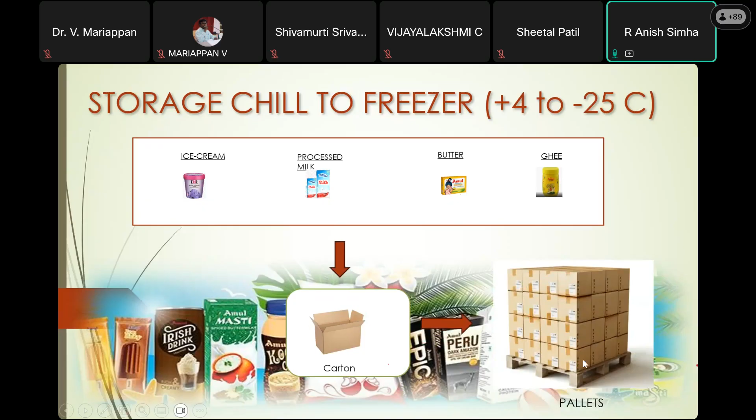So then how are they stored? Most of these products, including fish or meat, are stored in cartons, and then the cartons are assembled on pallets. So this is internationally how all these products are stored on pallets, and this is how they are handled. So then inside the store you can have various types of storage systems for the products.

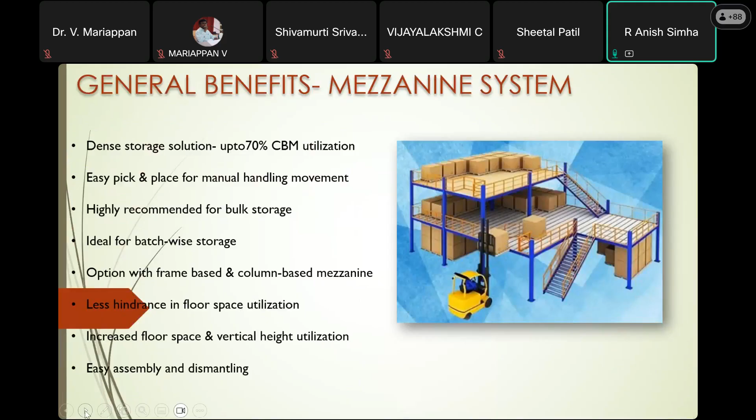So sorry, yeah, this is again the mezzanine kind of storage, and you can see how it is being designed. So the solution provider will discuss in depth with the customer about the packaging and such things, and then we come out with the solution. So you can see how the pallets are stored.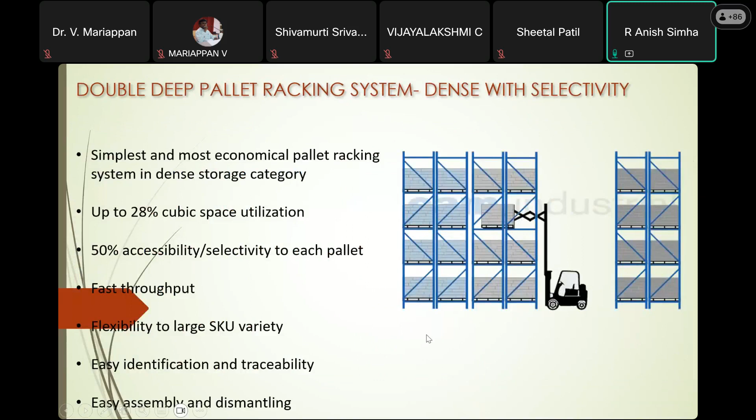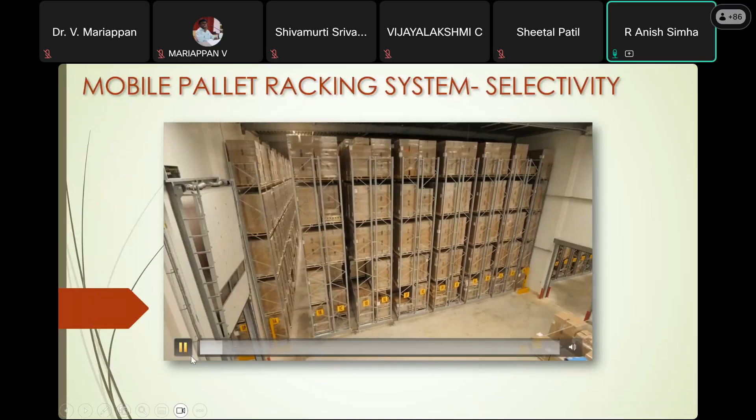So how do we reach the second one? You should use this kind of material handling equipment with arms. This requires space. It has to move in a straight way, and then for loading and unloading, the vehicle has to turn like this. So there you require space, whereas with the same space you can push them together and you will have more product when you go for a mobile pallet system. So this is the video of how the mobile pallet systems are being used.

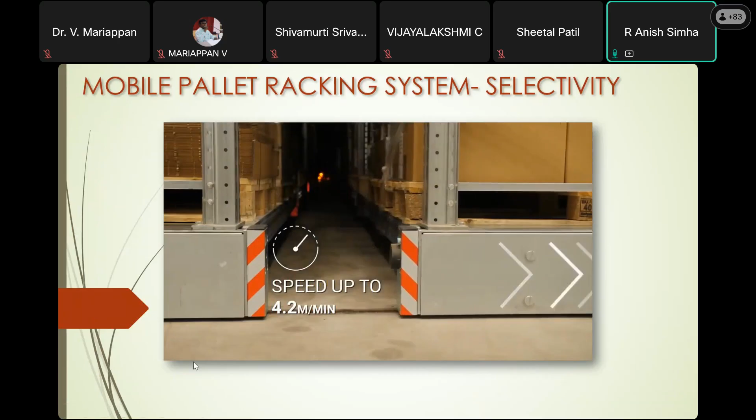So here also safety factors are looked into. The products should not fall off, and the machinery will not get stuck. There are sensors; injuries are very rare. It is all automated. So that is one kind of storage system.

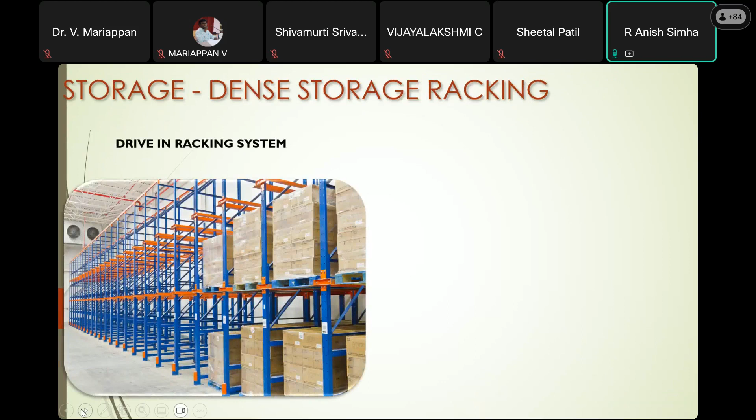Then you have the drive-in racks. There's a fixed one, where you have already seen how the vehicle can move in and go. And this is another interesting kind of storage where you have this shuttle. This shuttle can move around till the end, then it picks up the material, and you can again take it through a material handling equipment.

So there are many methods here for storage, a lot of solutions depending upon the customer's need and requirement, what he can afford, and what kind of system he's ready to invest in to get a faster turnaround of the products.

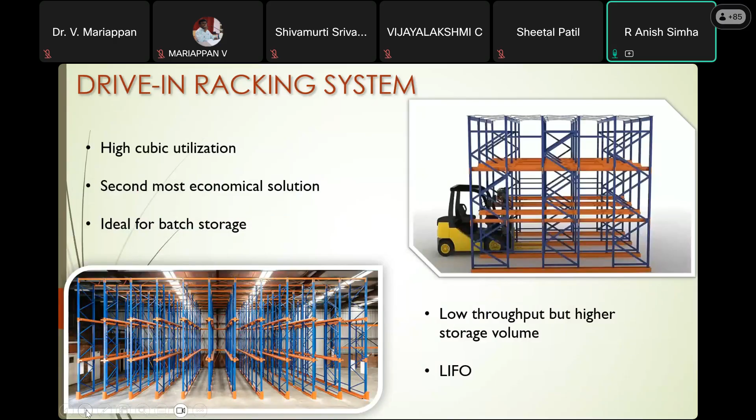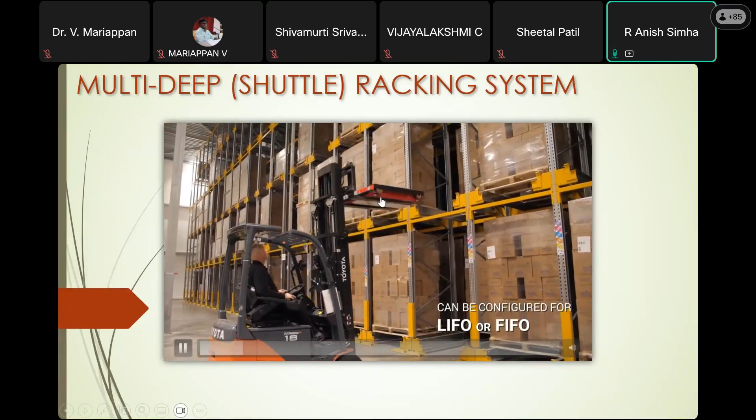So these solutions are available, and we help customers in choosing the actual solution they require for their product. So this is what I was telling you the shuttle is, and this video I think shows you how the shuttle moves. See, that's the shuttle. It is lifting the shuttle, and now the shuttle is positioned there. There are railings for the shuttle which are being installed. Then he moves the shuttle inside.

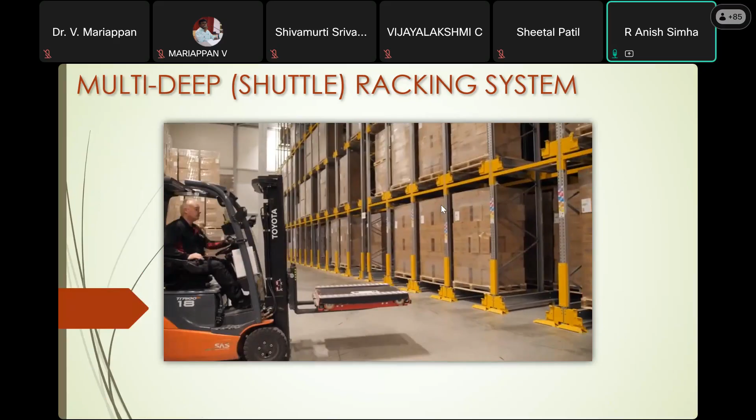It picks the products and comes back. So the shuttle and the product get separated. The same shuttle can be used. Generally, customers will have some 7 to 8 shuttles so that they'll always be in use. So that is the storage using shuttle.

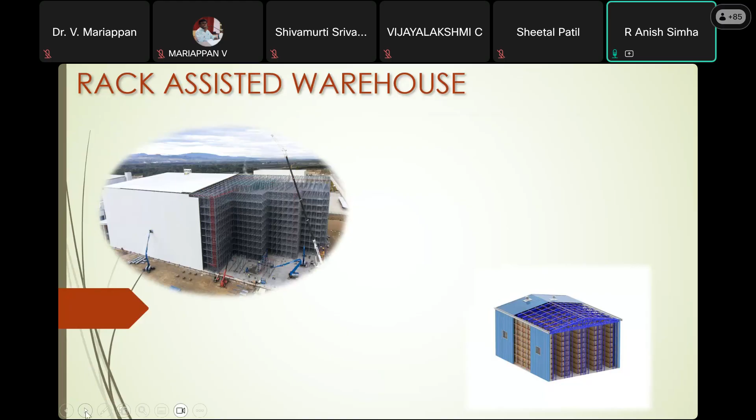And then regarding construction, for very large cold stores, what is being done nowadays is the storage rack is first built, and then it is cladded with insulated sandwich panels. So there is no other requirement. There is no civil work. Human dependency is very less, and it saves time to install these kinds of systems. And of course, they have insulation, so it's a very good solution which saves energy. So these are some of the highlights.

When you go higher and higher, you will have 100% utilization of the footprint. And these kinds of solutions are there. And this has already been there in our country itself. Many customers have used them. And this is the automatic storage and retrieval system. Here, earlier you were seeing we used to leave around 3 to 3.2 meters space for the vehicle to move, but now every aisle will have a crane.

So then there will be products here which will be either going inside the room or coming out of the room on conveyors. So conveyors will be moving in, so there is no human being going inside. These are all programmed. All of them have barcodes. So the crane is programmed to pick this up when the material reaches from the conveyor at this point, it will go in position, and then there's a record of which product item is where. So it's a fully computerized system, and that's why it is called an automatic storage and retrieval system.

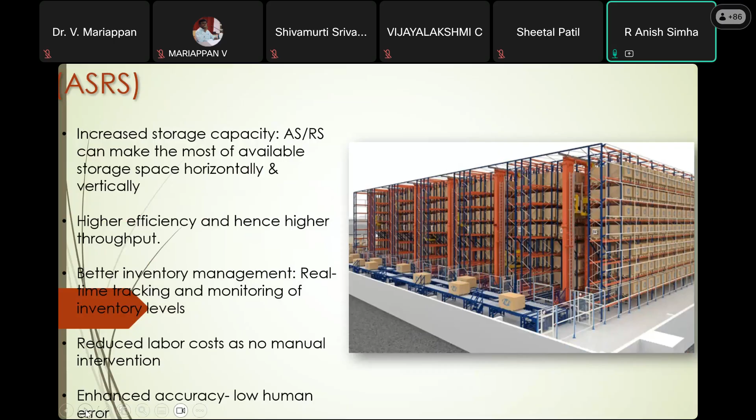So this is the latest, and it saves refrigeration load because there is no light required and no people moving. There are no big doors. There is no air infiltration to a very large extent. Air infiltration gets reduced because the door will be only equivalent to the conveyor's width and the product height. So we are saving a lot of energy when you go in for this kind of storage system. This is how it is being done.

And we have this video which is there even on our website, so I'm not going to go through that now. These are the last few slides; I'm just concluding my presentation. These are the insulated sandwich panels where you use these kinds of cam locks to lock them and make them airtight when we are constructing any room. And in between is the insulation. It is a polyurethane based insulation, and these two are metal finishes.

It can be pre-coated galvanized steel, it can be anodized aluminum, or it can be stainless steel, depending upon the customer's requirement. Based on the product requirements, the material of construction of the sheet will be considered. So one point we would like to highlight here is there is no metal to metal contact from inside to outside, and all these are plastic material, because we do not want conduction to happen.

Inside I may be maintaining minus 45 degrees centigrade, and outside, say in Bangalore, it can be about 30-32 degrees, it can go up to 35-36. So there is a huge temperature difference from inside to outside, and if it's Chennai, the ambient goes to 45 or 43 degrees centigrade. So if there is metal to metal contact, here you can see initially condensation and then a lot of ice formation, because inside we are maintaining minus 45.

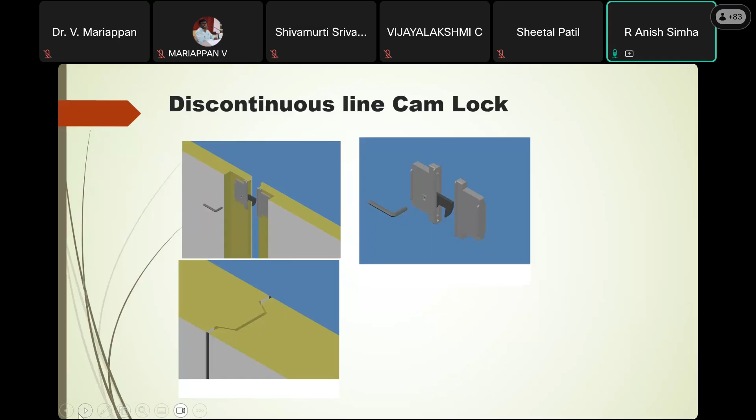So this one precaution is considered when we are installing such rooms and manufacturing the panels, that there will be no metal to metal contact from inside to outside. So for any item we need to suspend, we always use threaded rods which are made of HDPE or plastic. So it's not anything with metal. So this is the other method of panel manufacturing. That one with cam lock is a discontinuous line, whereas this is from a continuous line.

We get this kind of sandwich panels where you use them where the production capacity is very high, and then there is no cam lock, but you get a tongue and groove fit. So these are also airtight, and in some of the applications, especially for apples, we use these kind of panels for gas tight chambers.

So why do we use gas tight for storage of apples? Apple storage is called the controlled atmospheric chamber. That is one form of storing apples. And these controlled atmospheric chambers will be very close to the place where the apples are grown. So there we would like to maintain the apple in a condition which will retain its humidity or moisture content in the apple; its taste and texture we also want to maintain, but for a longer duration, maybe 5 to 6 months or sometimes 7 to 8 months.

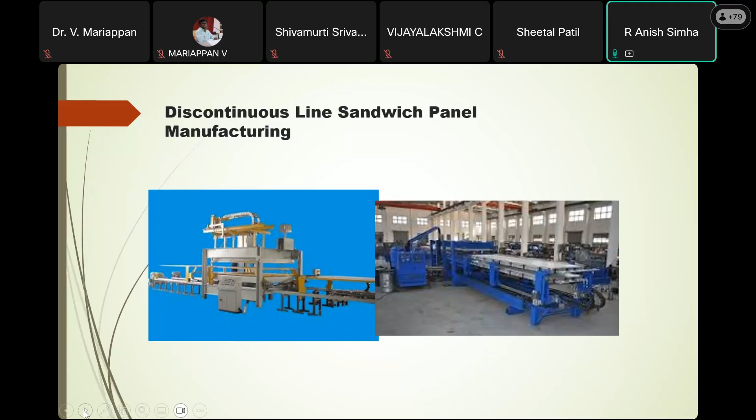The other method is this continuous line, wherein you can see there's a top sheet and the bottom sheets. They're from coils, coming directly from the mill. They're fed into this machine, and you can see this is the top sheet and this is the bottom sheet, and then this is the gun. As I mentioned, polyurethane will be liquid and then it will start solidifying. So here solidification has just started. This is a photo taken at one of the stages in production. So the gun will be somewhere at this point, and then the metals will be pulled along. So again, here pressure is being applied.

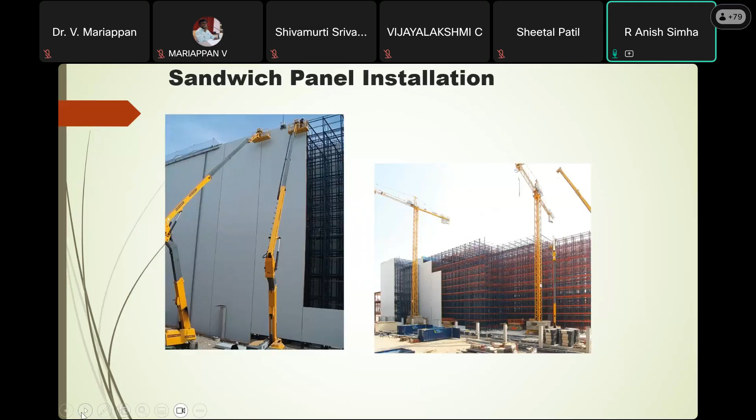So by the time it comes out, you get long insulated sandwich panels, and there is a cutter here. So here there is no restriction on the length of the panel. The restriction will be only based upon the transportation facilities. So this is how they are looking into sandwich panels. You can see how quickly the rooms can be constructed, and these are the kind of precautions that are being used. So these are a few pictures. You can imagine the height is around 35 to 40 meters.